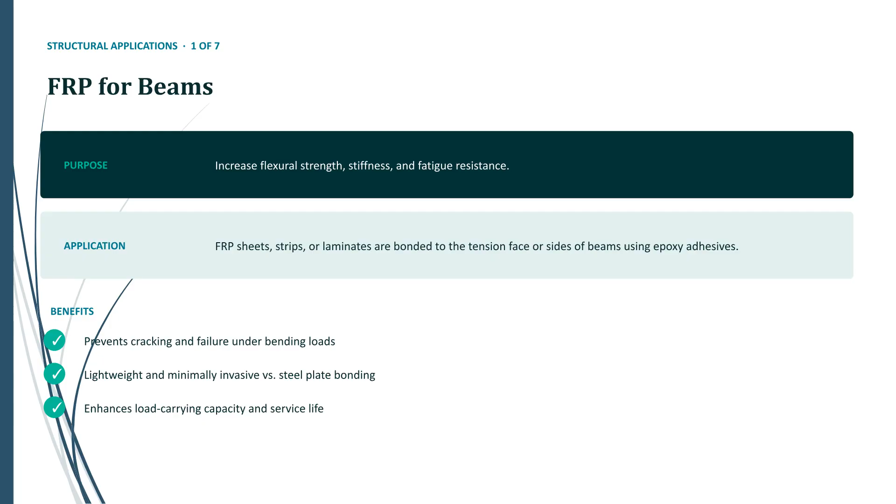It effectively prevents cracking and failure under heavy bending loads while remaining lightweight and minimally invasive compared to traditional steel plate bonding. Ultimately, FRP retrofitting enhances load carrying capacity and extends overall service life.

FRP for columns, structural applications. Moving to columns, fiber-reinforced polymers play a critical role in structural retrofitting. The primary purpose of using FRP here is to improve axial load capacity and confinement, significantly enhancing both overall ductility and strength. In application, continuous FRP wraps or composite jackets are wrapped securely around the perimeter of the column.

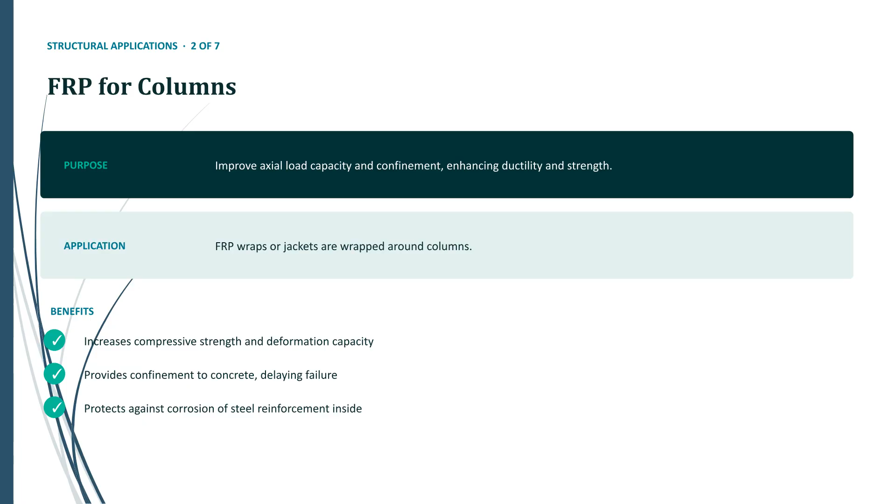This technique delivers key structural benefits. It increases compressive strength and deformation capacity, while providing essential confinement to the concrete that delays structural failure. Additionally, it protects the internal steel reinforcement from environmental corrosion, ensuring long-term durability.

FRP for slabs and floors, structural applications. Next, let's examine FRP applications for slabs and floors. The main purpose of using fiber-reinforced polymers in these elements is to increase overall load capacity and control cracking under service loads. In practice, high-strength FRP laminates or flexible fabrics are applied directly to the bottom or top surface of slabs, depending on whether positive or negative bending moments are targeted.

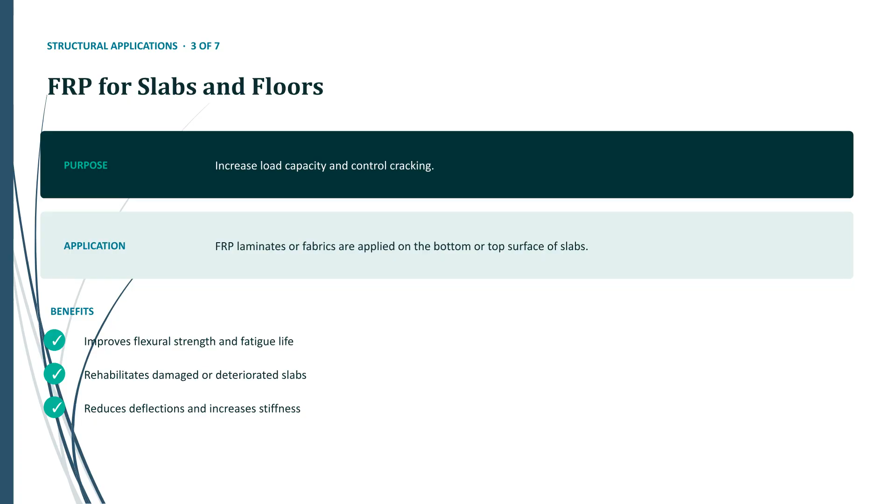This system provides major structural benefits. It improves flexural strength and fatigue life while effectively rehabilitating damaged or deteriorated slabs. Additionally, applying FRP reduces deflections and increases overall stiffness, significantly enhancing performance and durability.

FRP for walls and shear walls, structural applications. Turning to walls and shear walls, fiber-reinforced polymers serve a vital role in structural stability. The primary purpose of applying FRP in these elements is to enhance shear strength and ductility. In practice, high-strength FRP sheets or flexible fabrics are bonded directly onto the surface of the walls.

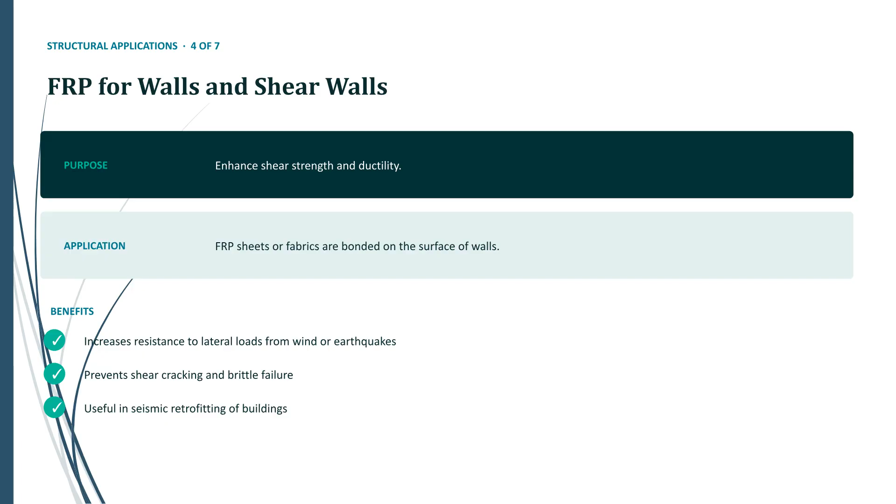This installation provides several critical benefits. It significantly increases resistance to lateral loads caused by severe wind or earthquakes. Furthermore, it prevents shear cracking and brittle failure, making FRP an exceptionally useful and reliable material for the seismic retrofitting of buildings.

FRP for foundations and footings, structural applications. Moving on to foundations and footings, fiber-reinforced polymers provide critical support below grade. The primary purpose of applying FRP in foundation systems is to improve overall load distribution and prevent cracking under structural stress. In terms of application, FRP materials can be embedded directly within concrete or wrapped securely around key foundation elements.

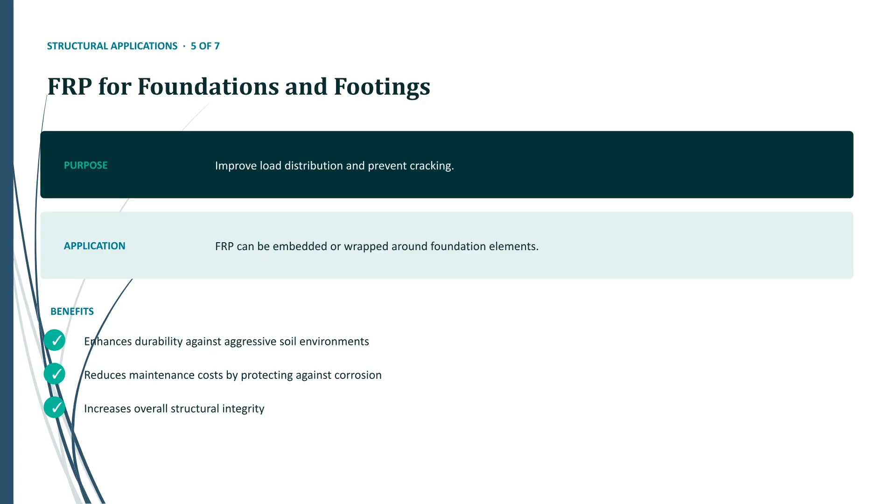This approach yields substantial long-term benefits. It significantly enhances durability against aggressive soil environments, reduces maintenance costs by protecting internal steel from corrosion, and ultimately increases overall structural integrity for the entire building.

FRP for bridges and infrastructure, structural applications. Turning to bridges and major infrastructure, fiber-reinforced polymers are playing an increasingly crucial role. The main purpose of using FRP in these large-scale systems is to efficiently repair, strengthen, and protect critical elements like bridge decks, girders, and piers. For application, FRP laminates, sheets, or reinforcing rods can be externally bonded to existing surfaces or used as internal reinforcement.

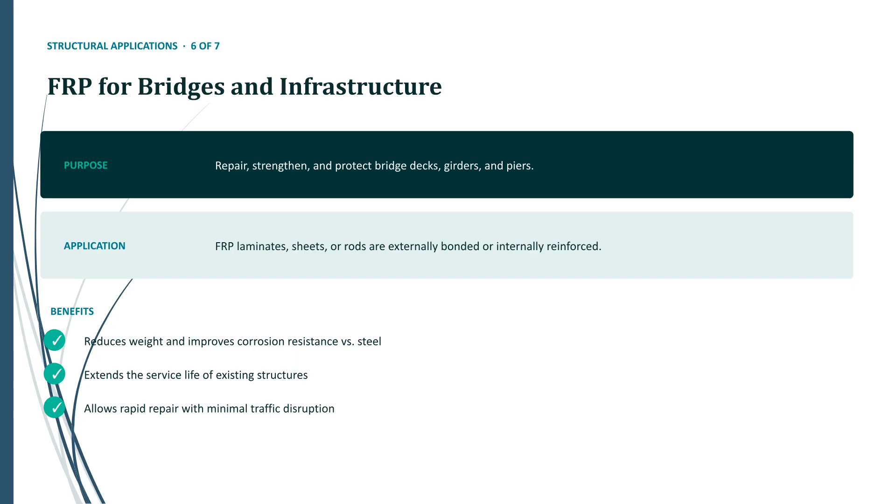This delivers substantial practical benefits. It significantly reduces overall weight while improving corrosion resistance compared to traditional steel. Furthermore, FRP retrofitting extends the service life of aging infrastructure and allows for rapid repairs with minimal traffic disruption.

FRP in seismic retrofitting, structural applications. Finally, let's look at FRP in seismic retrofitting. The primary purpose of using fiber-reinforced polymers here is to upgrade the overall seismic performance of structures by significantly increasing strength, ductility, and energy dissipation capacity. In application, targeted FRP confinement is applied directly to columns and shear walls to improve their flexural and shear capacities.

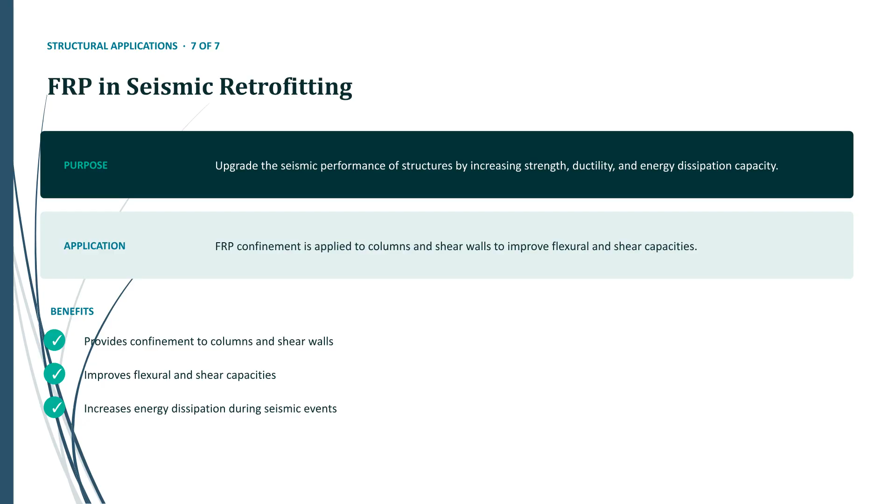This strategy delivers essential benefits during major earthquake events. It provides critical structural confinement to columns and shear walls, improves overall flexural and shear resistance, and significantly increases energy dissipation during seismic activity, preserving stability when it matters most.

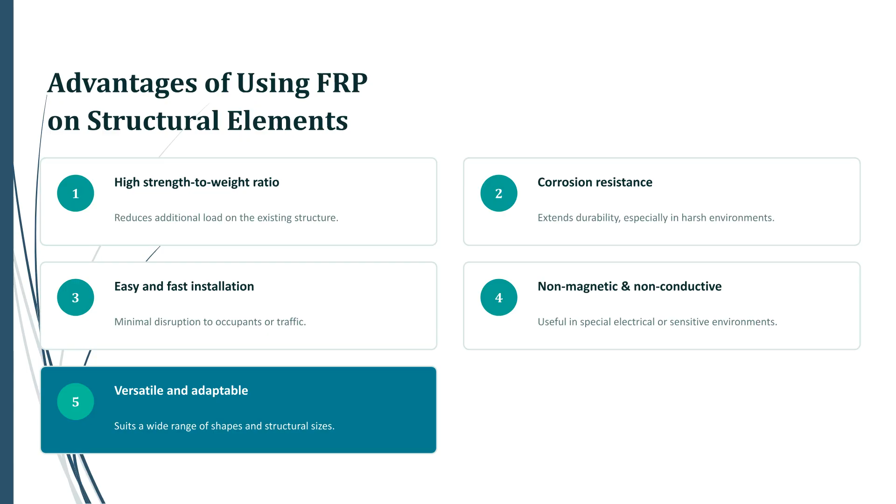Third, the material allows for easy and fast installation, causing minimal disruption to building occupants or traffic flow during retrofitting. Fourth, FRP is non-magnetic and non-conductive, making it ideal for sensitive electrical or specialized facility environments. Finally, it is highly versatile and adaptable, conforming seamlessly to a wide range of structural shapes and sizes.

Conclusion: built to perform, built to last. In conclusion, fiber-reinforced polymers are truly built to perform and built to last. Today, FRP is extensively used across the construction industry due to its high strength, lightweight nature, corrosion resistance, and exceptional versatility. Ultimately, FRP materials have transformed how we approach both new builds and the repair of existing infrastructure.

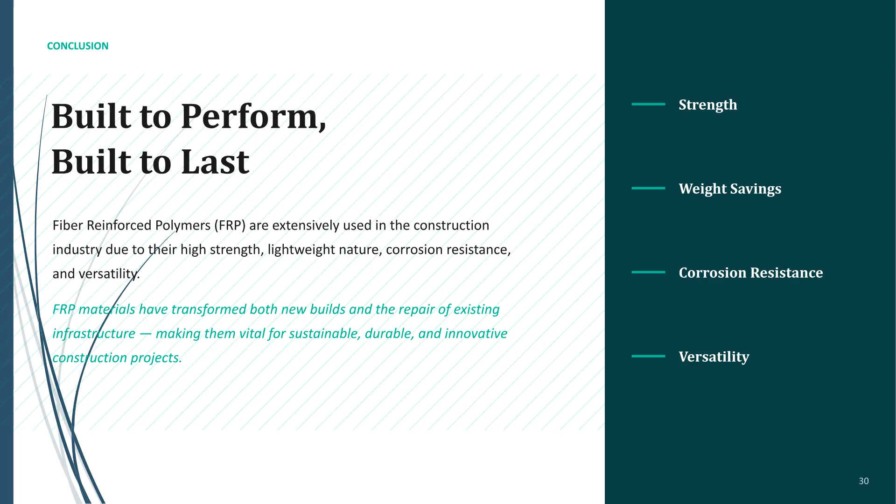By offering superior durability, significant weight savings, and long-term efficiency, FRP has become a vital component for sustainable, resilient, and innovative civil engineering projects around the world.